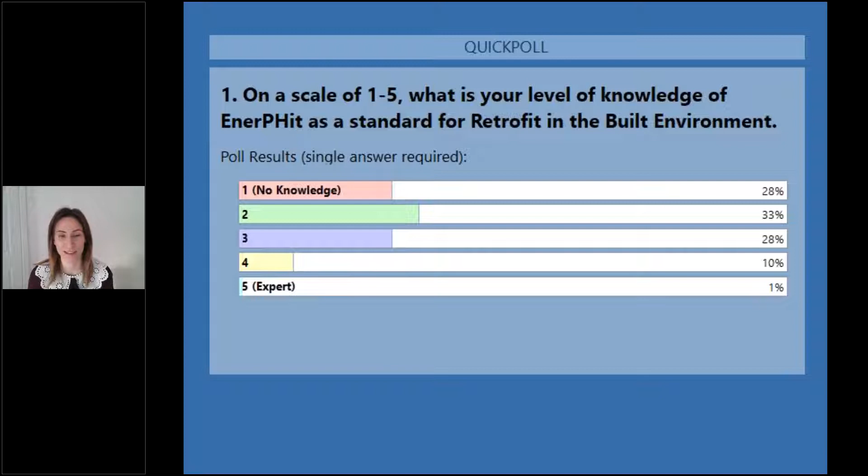Barbara is an experienced building performance specialist, leading Hab Lab building performance evaluation service and deep retrofit projects at John Gilbert Architects, focusing on post-occupancy evaluation, energy efficiency assessment, energy modelling, indoor air quality, ventilation, and much more. Barbara holds a wide range of sustainability accreditations, including the Level 5 diploma in retrofit coordination, risk management, and she is also a certified passive house designer. Barbara has also been instrumental in supporting Construction Scotland Innovation Centre with Low Carbon Learning, and in particular our immersive learning modules, which I'll mention later.

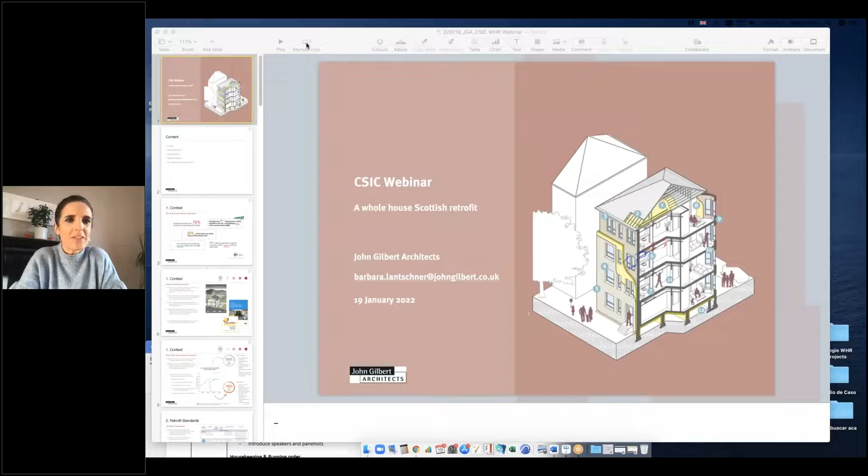So yes, I will be talking about a whole house retrofit and our experience in the last years implementing these whole house retrofit strategies across Scotland. So this is how I'm going to structure my presentation. I'll first talk about the context and a little bit about what deep retrofit and whole house retrofit means. I'll then guide you through the different retrofit standards, specifically the ones that follow this whole house retrofit approach. After that, I'll be talking about Hab Lab, which is a building performance evaluation service within John Gilbert Architects. The reason I'm going to talk about that is because it's very much linked to all the topics we're going to talk about today.

I'll then talk about different whole house retrofit strategies, and for the rest of the presentation, which is about 50%, I'll use Niddrie Road as an example of how we implemented many of these strategies. So why are we talking about retrofits so much? My role within John Gilbert Architects is I'm working 95% of my time on retrofit projects, so we are taking it very seriously. It's not only me in the office who works on retrofit. I have several colleagues working on that, and we also work on conservation, trying to merge these two types of projects to follow this whole house retrofit approach that I'm going to explain shortly.

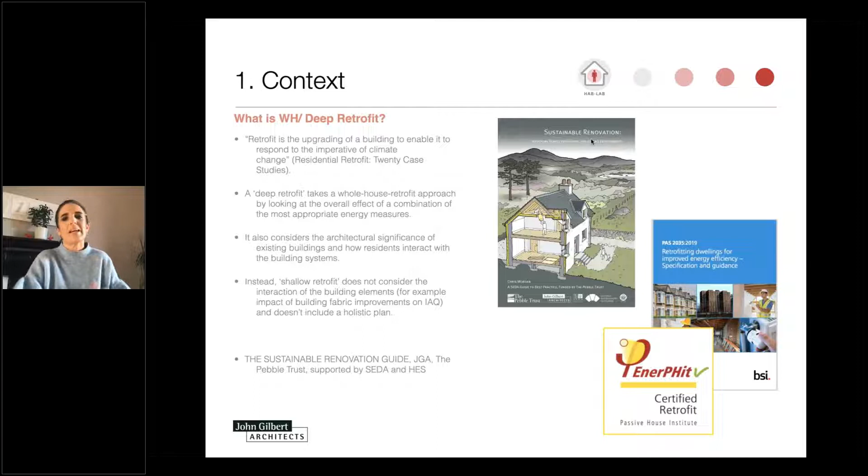Instead, shallow retrofit or conventional retrofit, or what we knew about retrofit until now, does not consider the interaction of the building elements. For example, and this is something very common, it's someone upgrading the building fabric without evaluating how that would impact indoor air quality or ventilation. So even if you're just installing one measure, you need to understand how that will impact the other building systems and have a plan in place to mitigate risks.

So there are many publications out there, many very useful guides, and there has been a lot going on lately. Last year, we saw very interesting guides that I will touch on in the next slides. One that I'm not going to talk about, and I suggest you have a look at,

is the Sustainable Renovation Guide, which is free to download, written by Chris Morgan, a director at John Gilbert Architects, and prepared for the Pebble Trust and SEDA, and Historic Environment Scotland. I do suggest you download that guide, which is very much linked to sustainable renovation in the Scottish context.

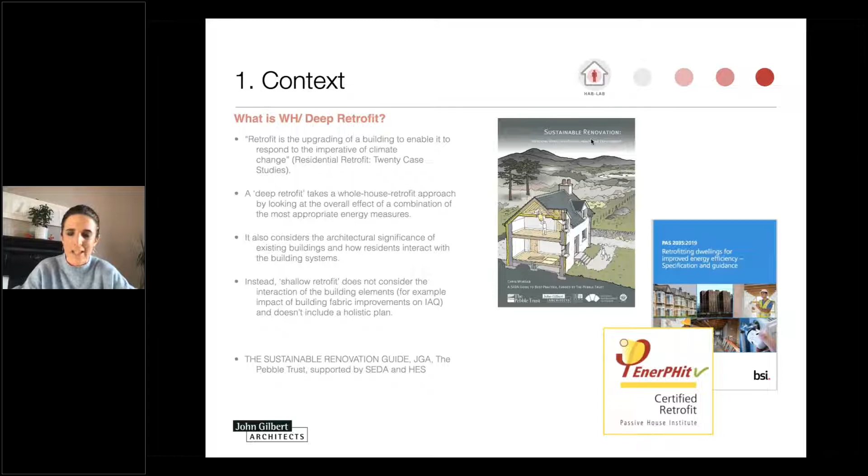So, talking about deep retrofit versus shallow retrofit, if we focus on the climate change targets and what we see in the graphic there, if we actually want to meet that transition to net zero and continue implementing shallow retrofit rather than whole house retrofit, the space heating demand or carbon emission savings are going to be about 30%. And that, as the graph shows, is not sufficient. We need to meet the targets.

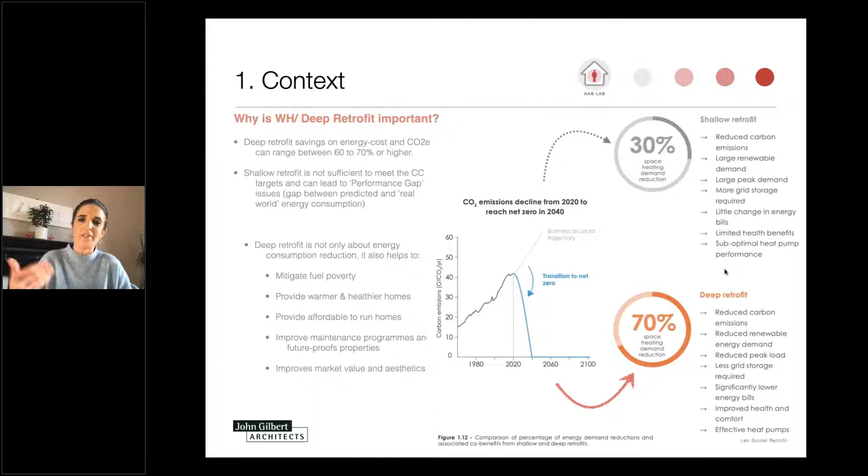We need a robust plan in place, and that requires deep retrofit. Whether the retrofit plan is staged or not, we will cover later on. There are different ways of implementing it, but it needs to be deep retrofit and whole house retrofit. Those graphs, by the way, I took from the LETI guide, which I'll also cover in this presentation, but I suggest you have a look because that's also a free resource.

Deep retrofit is not only about energy consumption reduction, it also helps us mitigate fuel poverty, provide warmer and healthier homes, provide affordable to run homes, improve maintenance programs and future-proof properties, and improve market value and aesthetics.

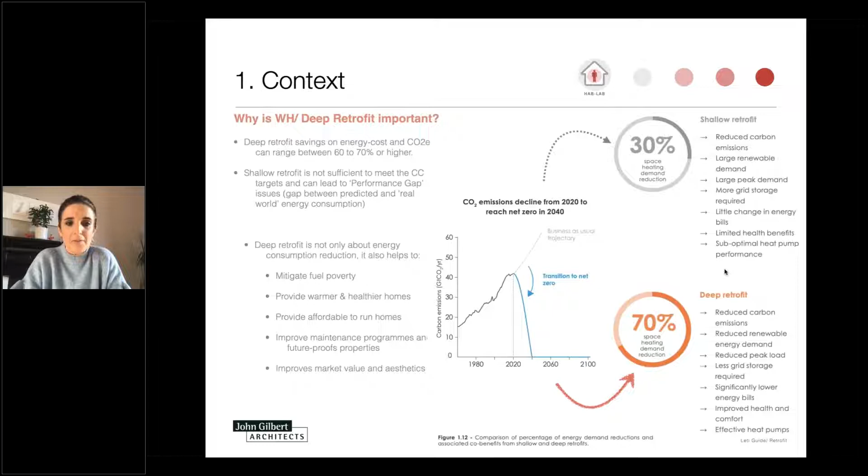So, I will also cover PAS 2035 in my presentation because I'm sure that you've already heard about it. It's now a requirement for some of the funding streams, for example, ECO3. It's not proposing a specific performance target, but it provides best practice guidance and quality assurance for domestic retrofit.

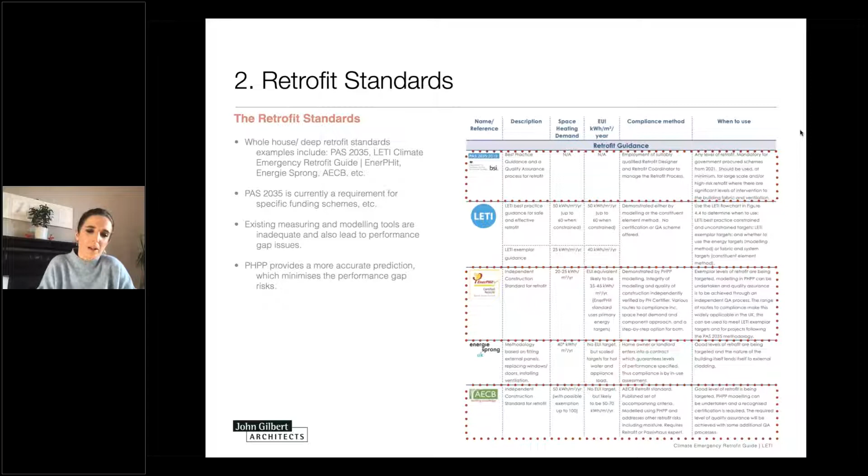And one of the things that some of the standards provide, for example EnerPHit, I would say specifically EnerPHit, is a modeling tool to be able to accurately predict how a building will perform after we implement the retrofit measures, and that will basically minimize performance gap issues. The other very interesting thing that EnerPHit provides is a quality control and a certification scheme. So all of this will minimize as much as possible the performance gap.

So what's EnerPHit? Passive house proposes, as you probably know, stringent performance targets, which are great because it ensures that the house will be not only efficient and cheap to run, but also comfortable, and it will future-proof the project. But in the case of existing buildings, we're not able to control many of the parameters, such as orientation, structure, occupation, shape, or the amount of glazing.

So because of that, Passive House several years ago developed the EnerPHit standard, which takes into account all these limitations. So basically what it does is relax some of the criteria that are used for new build. So it's not exactly the same as new build, but it follows the same methodology. It also suggests using PHPP, which is the energy modeling tool. It still insists on making a building as airtight as possible, but at the same time providing a robust ventilation strategy.

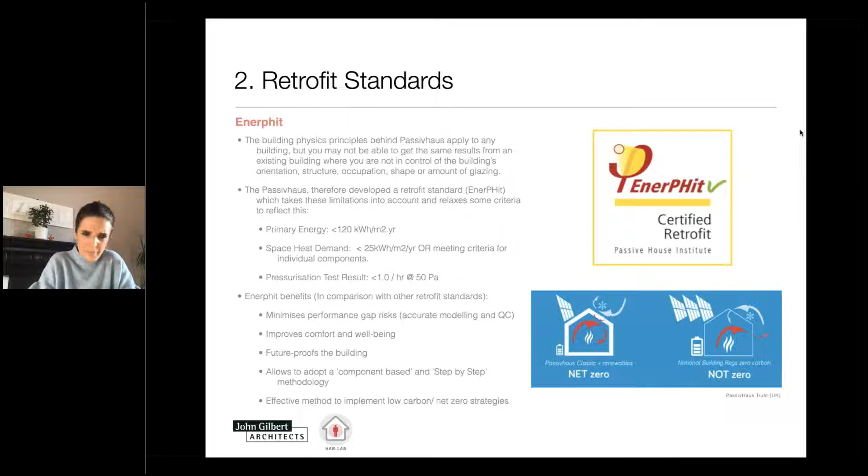And overall, the benefits of EnerPHit compared to other standards are that it minimizes the performance gap as low as you possibly can, improves comfort and well-being, future-proofs buildings, allows you to adopt a component-based approach, and also a step-by-step methodology.

PAS 2035 is, as I mentioned before, not proposing a specific performance target. So it's not focusing, let's say, on a specific airtightness target or energy consumption target or space heat demand target. What it does instead is provide best practice guidance on what process a retrofit project should follow to ensure that we are minimizing the performance gap. So it also works around performance gap. It follows a whole house retrofit without necessarily proposing a specific performance target.

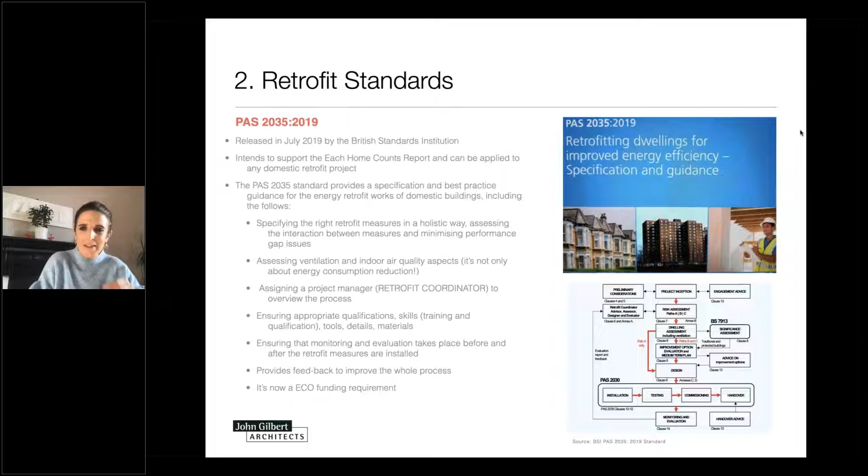It was released in July 2019. That's a couple of years ago, but the industry is still trying to adapt to it. It is intended to support Each Home Counts, which I also invite you to read and go through, because it was in response to that that this retrofit standard was prepared. And it's important to remember how things were working, what the main issues were that the industry was facing and is still facing, and how the standard proposes to mitigate those risks and issues.

So it provides a specification and best practice guidance for energy retrofit works, specifying the right retrofit measures in a holistic way, assessing the interaction between measures and minimizing performance gap issues, assessing ventilation. Ventilation was not really in the scene unless you would work with EnerPHit and these other standards that I mentioned before. Until now, there wasn't really a need of thinking, and there was no guidance in the UK suggesting that ventilation had to be part of a retrofit strategy.

So assessing ventilation and indoor air quality aspects, assigning a project manager, which is the retrofit coordinator, to oversee the process, ensuring appropriate qualifications. That includes assessor, advisor, evaluator, etc. Ensuring that monitoring and evaluation takes place before and after retrofit measures are installed, which is done by the retrofit evaluator. It provides feedback to improve the whole process, not only to clients and architects, but also to the whole industry. And as I mentioned before, it's now an ECO funding requirement.

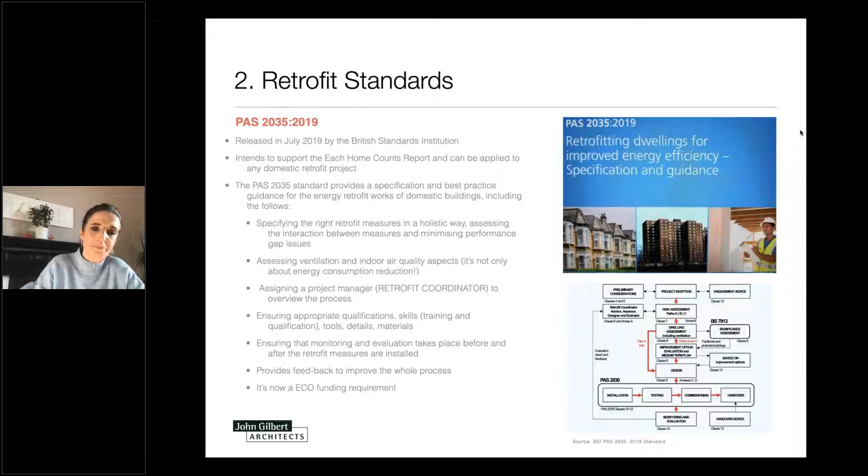So a little bit about HabLab. I started at JGA actually as a building performance specialist, working 100% of my time on building performance evaluation, and that is HabLab, which is a consultancy service within John Gilbert Architects. It actually started about 7 years ago as a project, and it's now a service, and there are several of us working on it. What we do is provide building performance evaluation for clients. Most of our clients are housing associations and local authorities, but we have also done it for private owners and for commercial buildings.

So building performance evaluation is the process of evaluating the real in situ performance of buildings with, I would say, more scientific methods. So what we do is visit the building, install sensors, and understand in depth how those buildings perform. What the HabLab studies has helped us is to provide accessible POE for clients. That means commercially accessible, because there are many out there doing building performance evaluation. But what we have developed together with the Glasgow School of Art is a methodology to make this commercially feasible.

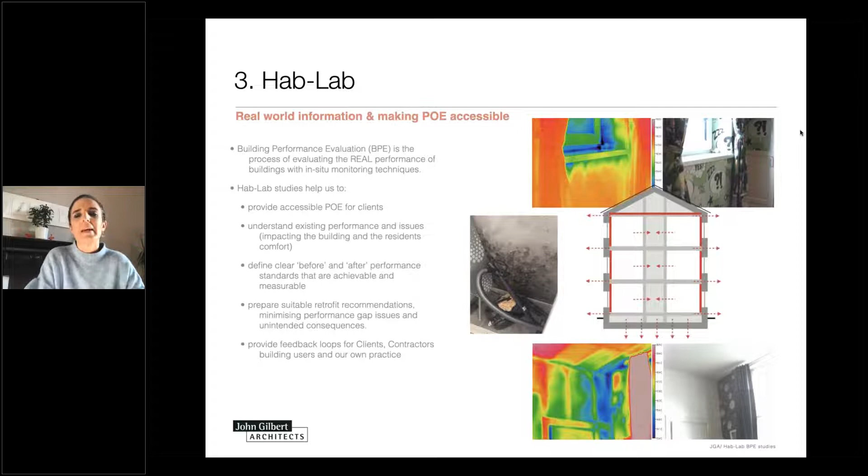What you see in this slide are the types of test and equipment that we use or can use for our building performance evaluation projects. Most of these projects are retrofit projects. We sometimes have evaluated new build projects to see how they perform, but we generally use it for retrofit projects. So we go to a building that hasn't been retrofitted or that has been recently retrofitted and evaluate how it is performing. The brief and exactly what to test is defined at the very beginning with the client and discussed, and we base that on the available time and resources.

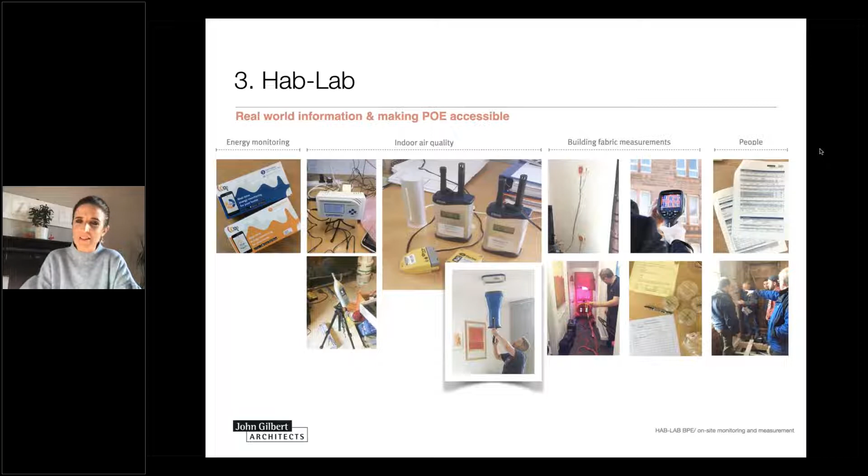But in general terms, we monitor energy consumption, that's gas and electricity. We monitor indoor air quality. I will cover this in the next slide, so this is just a general overview. And building fabric measurements. And last but not least, we also conduct in situ surveys with occupants to understand comfort levels and understand how they use the buildings and how the buildings are impacting their comfort and health.

So we've done this, as I mentioned before, for about 7 years now, and I will try to summarize in this slide what we have found in existing buildings or in buildings that had been recently retrofitted or improved. So the first thing is that for buildings where building fabric measures had been installed, we have seen that the buildings are generally more airtight and more efficient, but unfortunately not designed correctly, and that creates gaps in the insulation layer and in the airtightness layer, which leads to heat losses, moisture, dampness, and indoor quality issues.

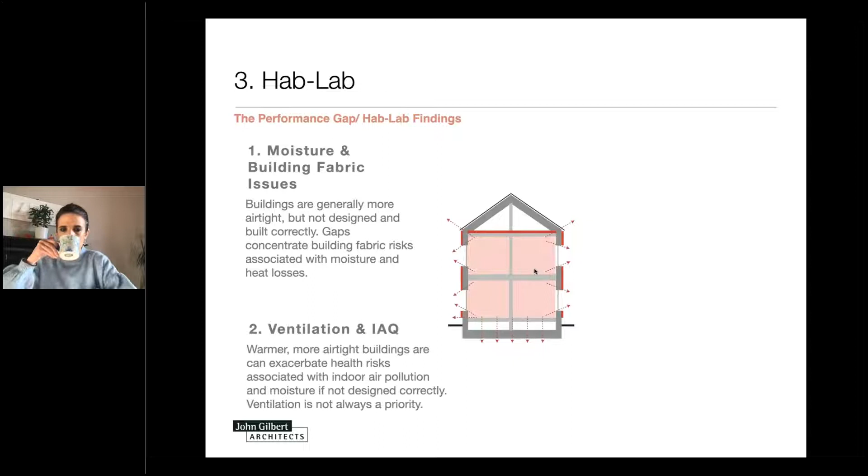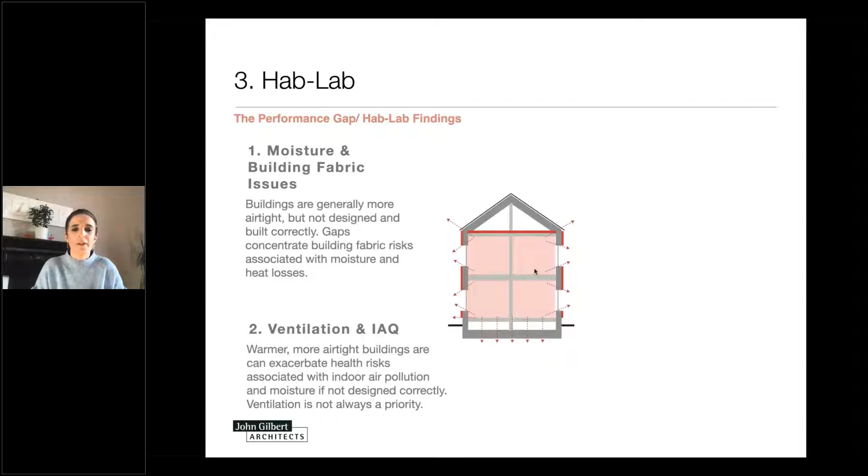The second point is ventilation and indoor quality. So the issue around that is that we found that warmer and more airtight buildings can exacerbate health risks. I do want to clarify this: we do want buildings to be airtight, and we need buildings to be airtight, because that will minimize and reduce heat losses. It will reduce heating demand, and it will reduce CO2 emissions.

But if we make them more airtight without developing a ventilation strategy, that would lead to poor indoor quality, which impacts the occupants' health and comfort. So airtightness is not a bad thing, it's a great thing, as you probably understand, but it needs to come together with a robust ventilation strategy.

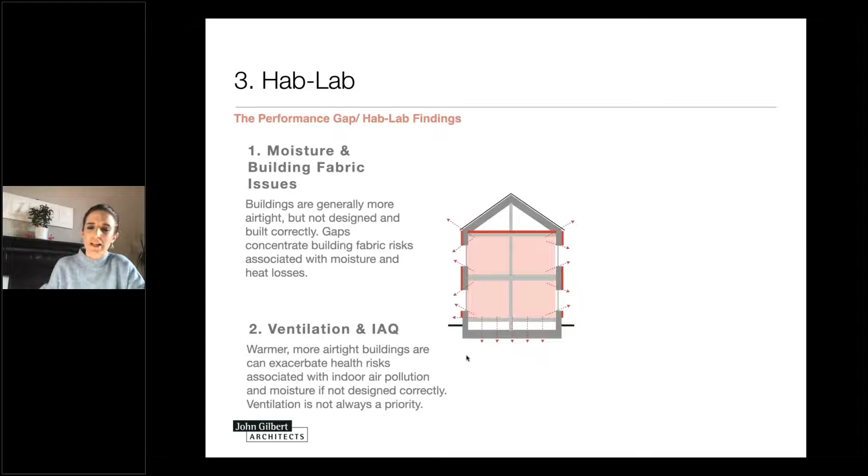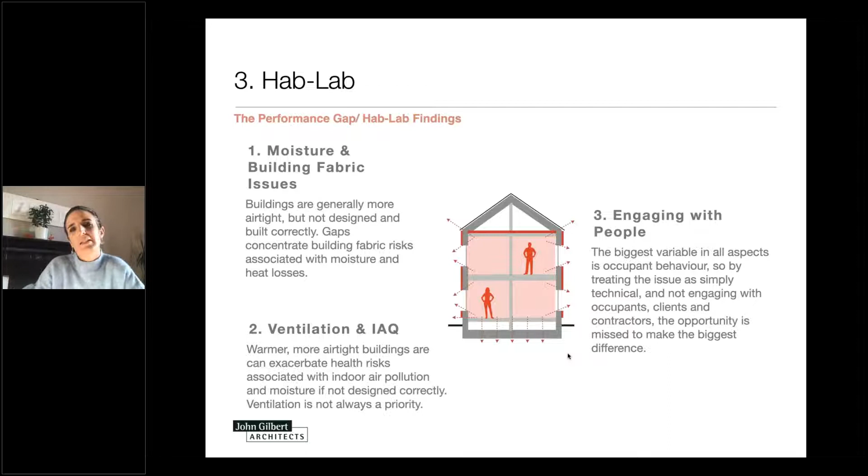And the third point that we have found is that retrofit works are generally too focused on the building, and they underestimate the impact of engaging with people. So one of the biggest variables is how to engage with the building occupants, but also how to engage with contractors. And all of this is a missed opportunity: not informing well and not discussing these retrofit recommendations or works with the residents, and not making sure that everyone understands the purposes of a retrofit project, can lead to performance gap issues.

So the next couple of slides show some examples of how we use these techniques. For this specific project, we had to prepare deep retrofit recommendations for a series of cross-wall properties. You probably have seen these buildings in Scotland and across the UK. These properties were built around the 1950s, and the building fabric is a mix of cavity brick walls and infill walls.

So we used thermography to highlight that difference, to analyze how the cavity brick walls were performing, where the issues were, and how the infill was performing. So if you see the thermography at the bottom, you see different surface temperatures and how one wall was performing differently than the other.

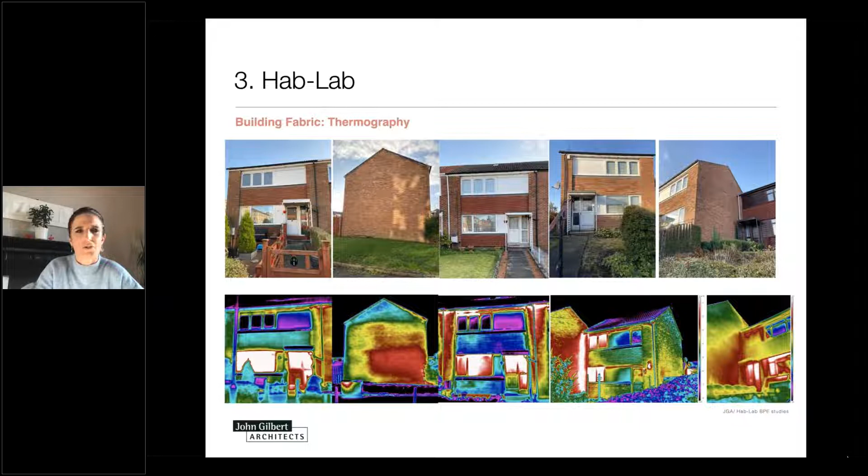So we prepared, based on that recommendation, airtightness and insulation recommendations based on what we were seeing in the thermography survey. We also conduct airtightness tests, which you probably know very well, so I'm not going to focus on airtightness. What I wanted to show here is that while we do the airtightness test, which is the process of pressurizing or depressurizing a property by installing a big fan that you see there in the picture, we also do a smoke pen test while we conduct the airtightness test.

The person in that picture is actually Tom Barber from Thermal Image UK, who does most of our tests. And what he does, and sometimes we do as well, is walk around with a smoke pen, identifying where the air leakages are. That's not necessarily common practice and not required in the building regulations, but the end result is not only going to be the general airtightness. We will also know specifically where the main areas of air leakage are.

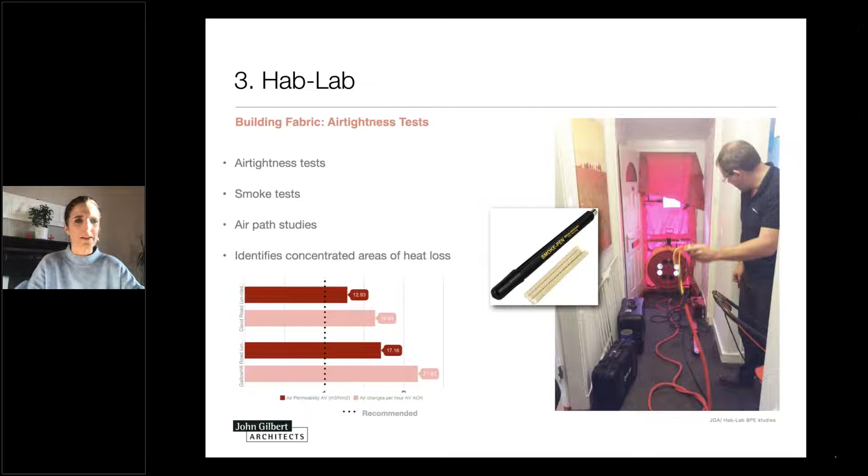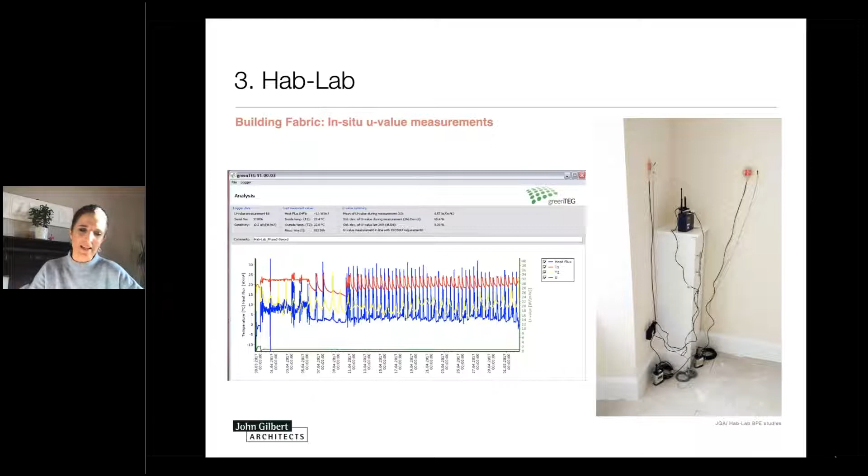We also do in situ U value tests to measure what the U value of different walls is. This is a more intensive, time demanding and expensive test, but you can do it if you have the time and the budget. So these are things that we have done in the past to prove existing and improved performances.

And we measure indoor air quality in most of our projects. The minimum that we recommend to monitor, if you don't have budget or time, is relative humidity, temperature, and CO2. This will give you a good idea of comfort levels and risks of mold growth by knowing the relative humidity. CO2 is a proxy to have an idea how efficient the ventilation system is and how good the indoor air quality is. A high concentration of CO2 is not dangerous, that's not a worry, but it's an indication that there might be other pollutants affecting our health.

So those three give us a good idea of indoor air quality. If the client wants something more detailed, in addition to that we can do formaldehyde, VOCs, and particulate matter monitoring to analyze different types of things. It really depends on the project.

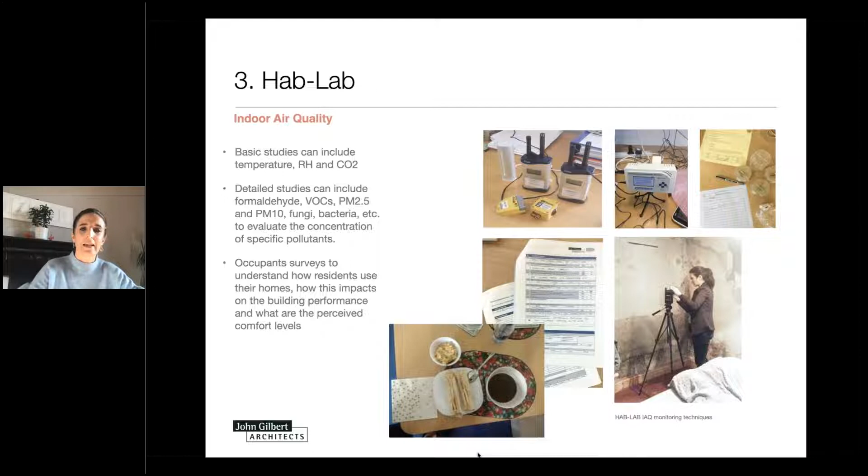And as I mentioned before, we conduct an occupancy survey. What you see there is a lunch that one of the residents prepared for me once. Of course I didn't ask for that, but I welcomed it because it was great. Sometimes occupancy surveys are not necessarily structured. It's about having a chat with the resident to understand, without making it too formal, how they perceive their houses, where the issues are, how they use their systems or not, if they understand where the ventilation controls or trickle vents are, and you need to take your time to do that.

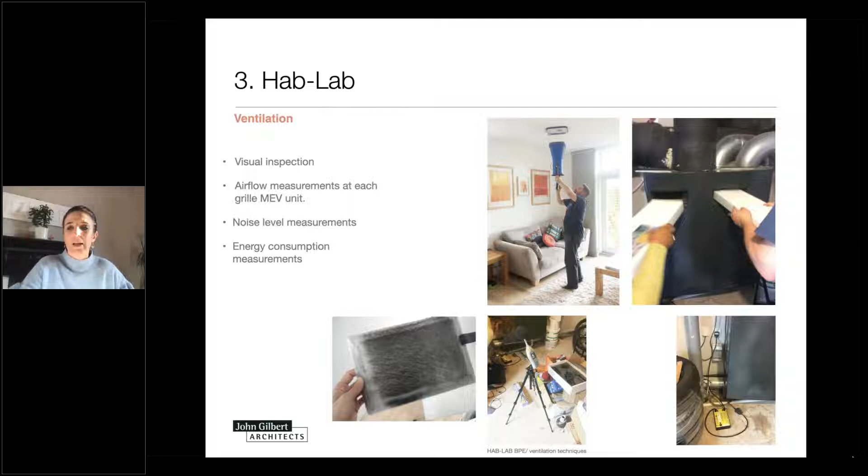We also measure the efficiency of ventilation by visually inspecting it. If there is a mechanical ventilation system, we take airflow measurements. What you see there on the top left is Chris measuring airflow with an airflow meter. Top right is us checking the filters of an MVHR. And in the bottom, we're measuring the noise levels of an MVHR. We're checking the condition of filters and measuring the energy consumption of an MVHR.

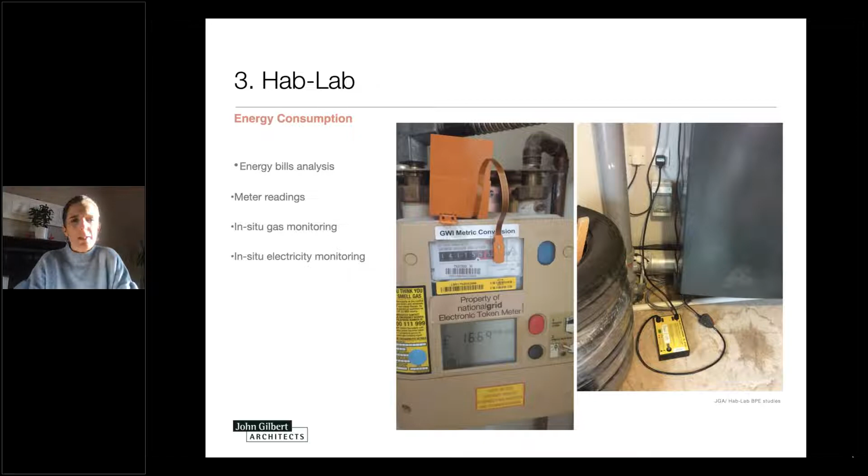And the last thing is that for the majority of our retrofit projects, pre and post, we conduct an energy consumption analysis. If we can't install sensors, we ask for energy bills and try to analyze a couple of months of energy bills. If that's not available, we conduct meter readings. And if possible, we conduct in situ monitoring.

And the last thing about HabLab, we engage with people, not only with residents. We try to do that throughout the process, from the very beginning, engaging with the client, trying to understand the brief in depth, conducting accurate modeling and informing the client. We try to improve every day the documentation that we provide to contractors. We try to improve supervision and inspection on site, try different methodologies to improve that, and try to improve the handover by preparing easy to read quick start guides.

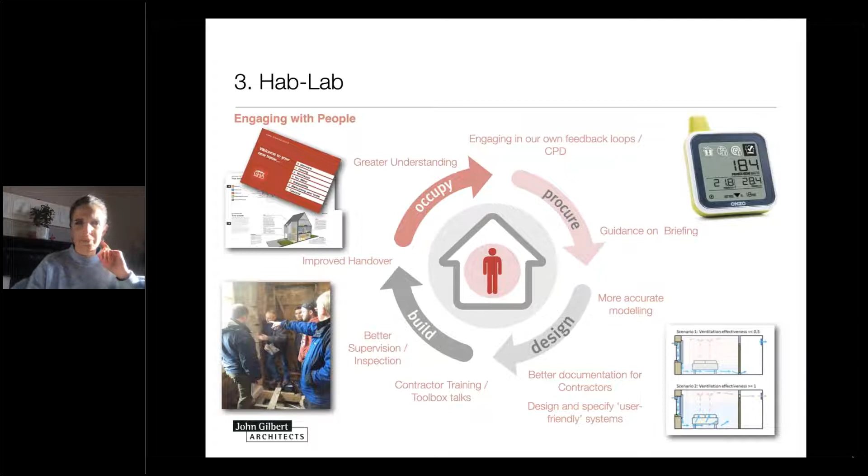So in terms of retrofit strategies, I'll quickly go through that because we will also cover it during the case study. One of the most important things to take into account when considering retrofit strategies is the fabric first approach.

Many standards that we have mentioned before, for example, EnerPHit and PAS 2035, follow this approach, recommended as best practice guidance. The fabric first approach intends to ensure that existing building fabric is as energy efficient as possible before considering the improvement of active systems.

When I'm talking about fabric, I'm talking about walls, roof, floors, windows and doors, the general envelope, and that includes thermal bridging and air tightness. So we should consider all of that. If we can't do it immediately, have a plan for the future on how to improve that before considering active systems, which are heating, domestic hot water, and ventilation.

It prioritizes improvement in 5 stages. Bring the building fabric into good repair, so making it retrofit ready, and that's maintenance, that's not improvement. Improve the building fabric, including insulation and air tightness measures, minimizing thermal bridging in order to reduce the heating demand. Meet the remaining heating demand using an energy efficient space heating and domestic hot water system.

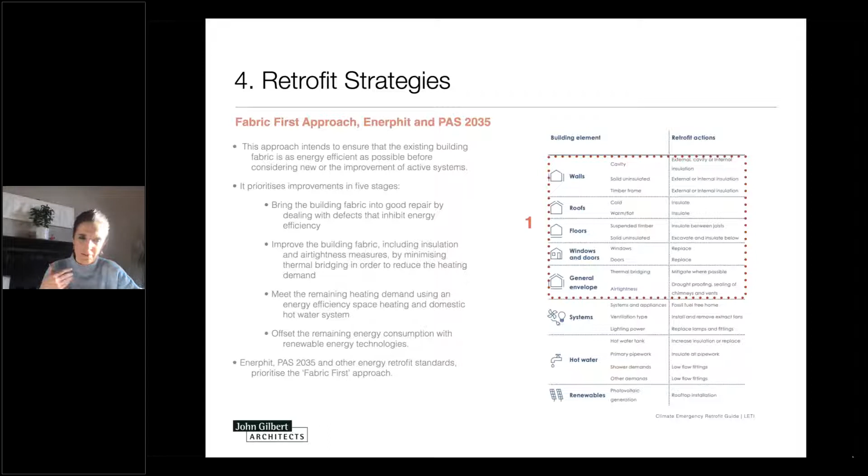So that doesn't mean that the active systems are not important. What it does, it prioritizes, it puts envelope first. It suggests a sequence on how you have to consider the measures.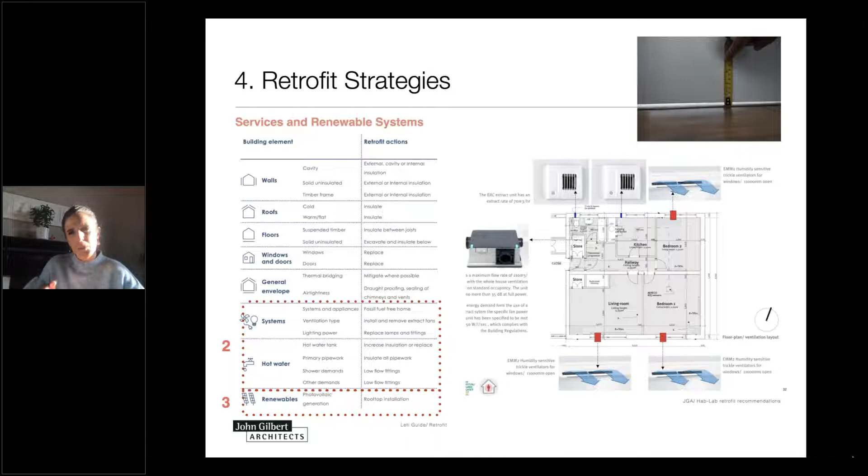The other thing that I wanted to mention is that some of the retrofit standards that we mentioned before have an option of implementing these retrofit measures in a step-by-step strategy. A radical whole house retrofit is great, but many times there are great financial barriers, and even if there is a budget, there is disruption, or properties are occupied. So it's sometimes not possible to do this all in one go.

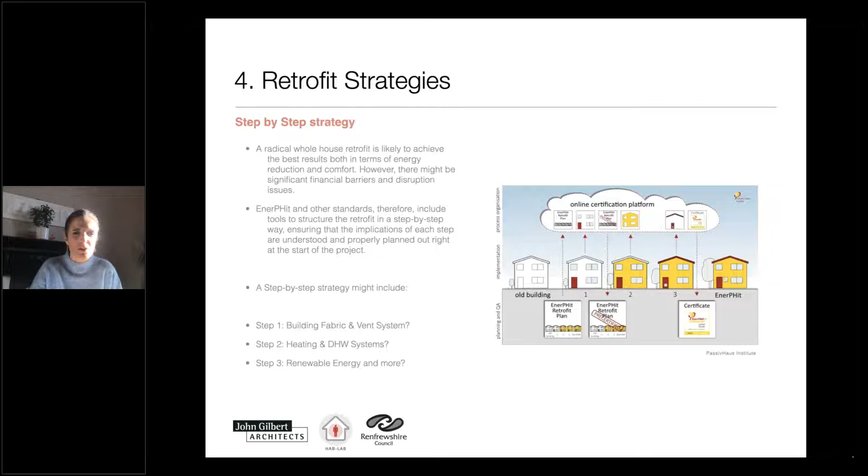So EnerPHit and other standards, and what you see on the right is a graph prepared by the Passive House Institute specifically for EnerPHit, suggest a way of implementing this in steps. One way would be to first improve the majority of the fabric, let's say everything except the floor because people are living there, and also install the ventilation system to ensure good indoor air quality. The second step would be heating and maybe domestic hot water system, and the third step could be renewables.

LETI, which I mentioned before, published a retrofit guide last year, which I really recommend you have a look at, because it's also free to download and they're doing great work. You can also volunteer and get involved.

But the great thing about this guide is that it takes into account different standards, for example, Passive House and EnerPHit, and also provides performance targets, some of which are based on EnerPHit. So these are the LETI performance targets, and I suggest you have a look.

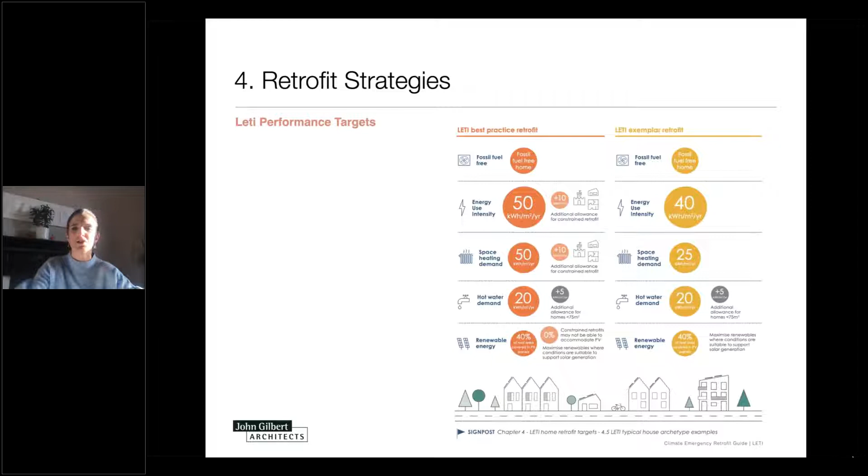So I'll now try to cover a very big and complex project, which is Niddrie Road, in the next 10 minutes.

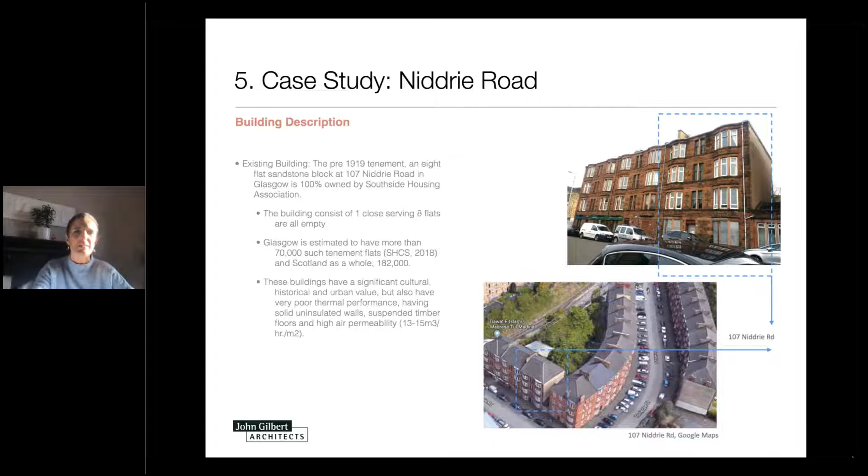When we started the discussion with Southside Housing Association, they wanted to comply with EESSH2, which is the energy efficiency standard for social housing. This standard, according to the Scottish Government, will contribute to reducing carbon emissions by 42% by 2020 and 80% by 2050. What it suggests is that social housing should meet a band B by 2032. That's an EPC of 81, so it's relatively high. That was the first discussion that we had with the client.

But the other need they had is that the layout had to be radically changed to improve accessibility and space conditions. All the properties were void when we started this. So there was a great need to future-proof these properties, to understand how far we could go. They wanted a deep retrofit and a radical approach. So we proposed EnerPHit because we still think it's the most robust and beneficial approach to meet Southside Housing Association targets, but also Glasgow City Council targets, which is one of the partners of the project.

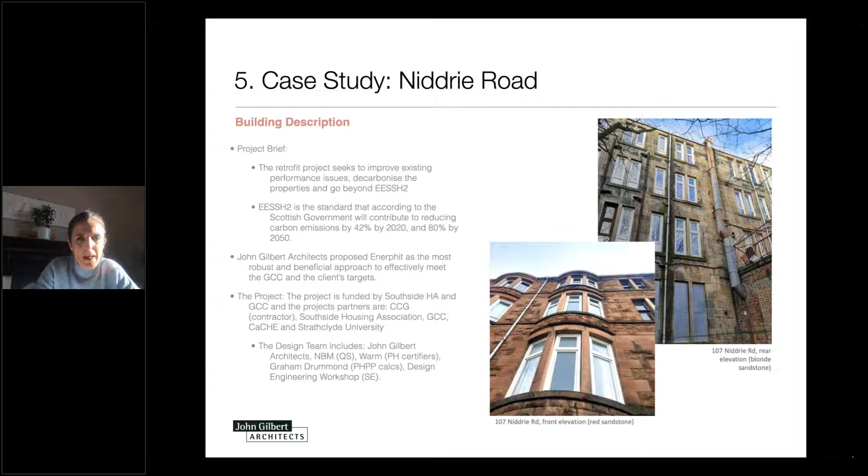Okay, the project is funded by the Southside Housing Association and Glasgow City Council. We're now actually on site. As we were saying before, it's an uninsulated property. There were many challenges, for example, the orientation. The form factor was relatively beneficial, but it's heavily overshadowed, so we can't make use of solar gains, which is crucial for passive house. There are very small southeast-facing windows and a large amount of northwest-facing windows. That means more heat loss than heat gains. And there were significant unavoidable thermal bridges.

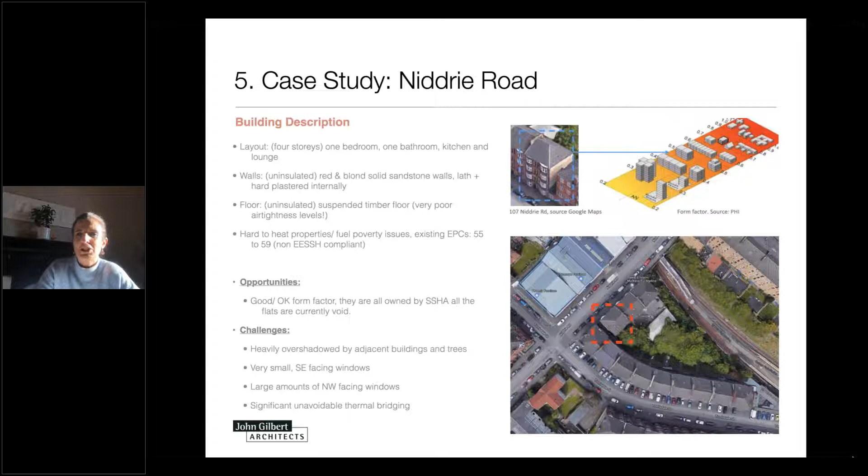That's one of the existing elevations, the front elevation, and the floor plans. As you can see, the WC had a very unusual layout, or actually a usual layout for this type of building, which had to be improved.

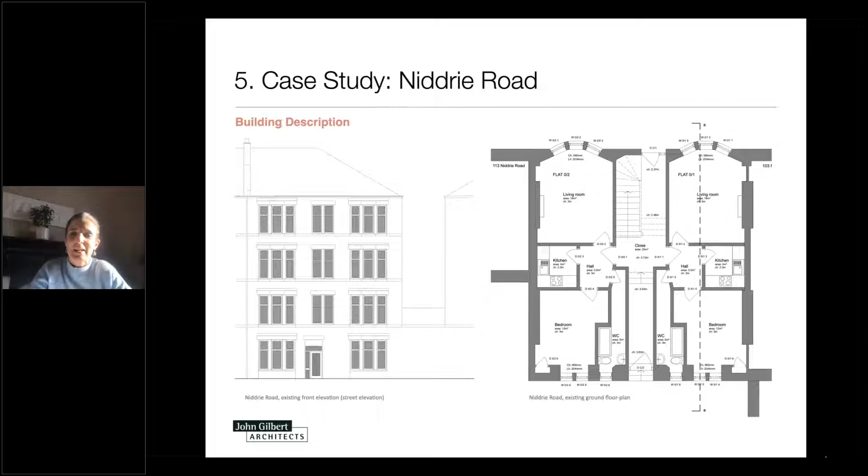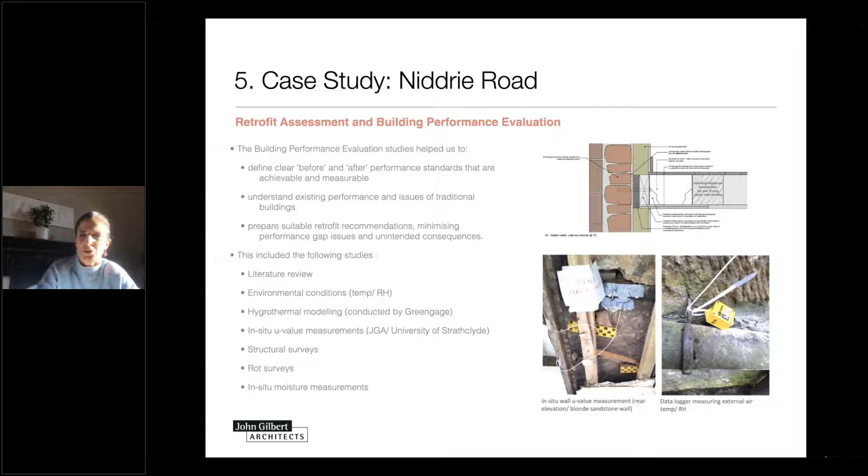We started the project by doing a retrofit assessment and a building performance evaluation, which helped us to define the before and after performance, because we also plan to do the post-retrofit evaluation. It helps us understand existing performance issues and base our retrofit recommendations on these findings. These studies included a literature review and monitoring of environmental conditions, including temperature and relative humidity. We conducted hygrothermal modeling by Greengage, in situ U-value measurements, structural surveys, rot surveys, and in situ moisture measurements.

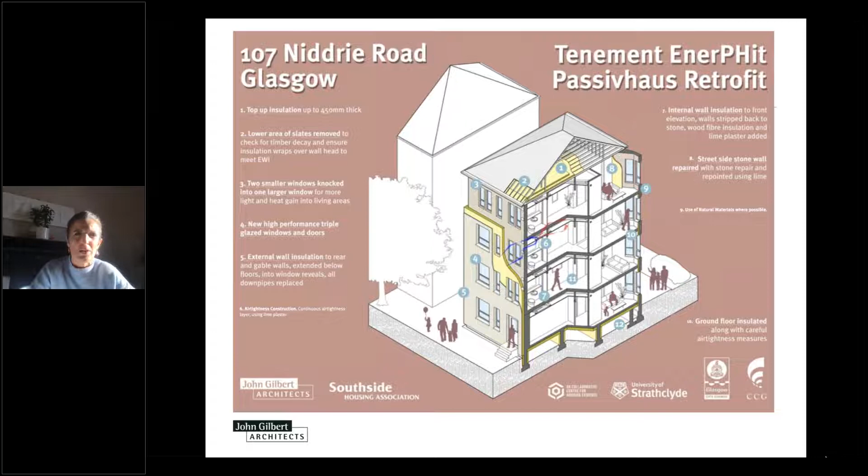In terms of the fabric, we took a hybrid approach, proposing internal wall insulation to the front so as not to affect the conservation aspect of the project, and external wall insulation to the rear and the gable end. We proposed wood fiber for internal wall insulation, which is in line with the breathable sandstone walls, and rock wool for external wall insulation. We did try to specify wood fiber for the external wall insulation, but that had to be changed because of a budget restriction.

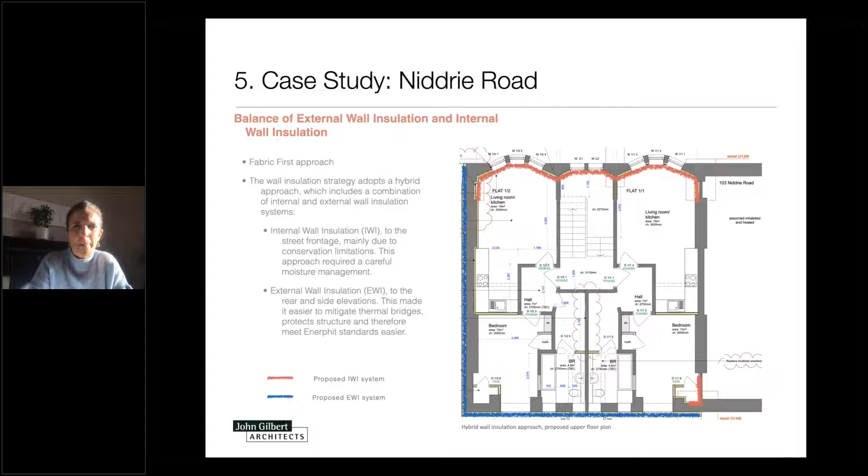We did a good amount of moisture management studies before defining the thickness we had to install for the internal wall insulation. The main worry was how this could affect the joist ends. We did hygrothermal calculations, which confirmed that what we were specifying for the external wall insulation was okay. The internal wall insulation was actually okay. It wasn't introducing any issues to the wall, but it was introducing issues to the joist ends.

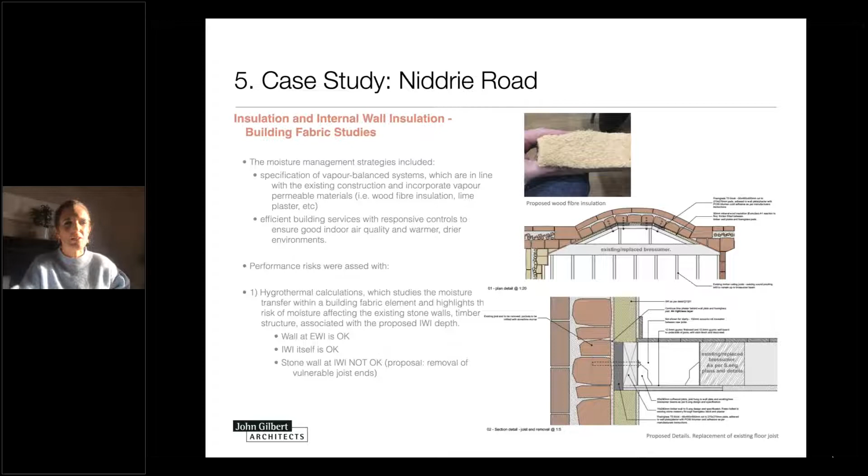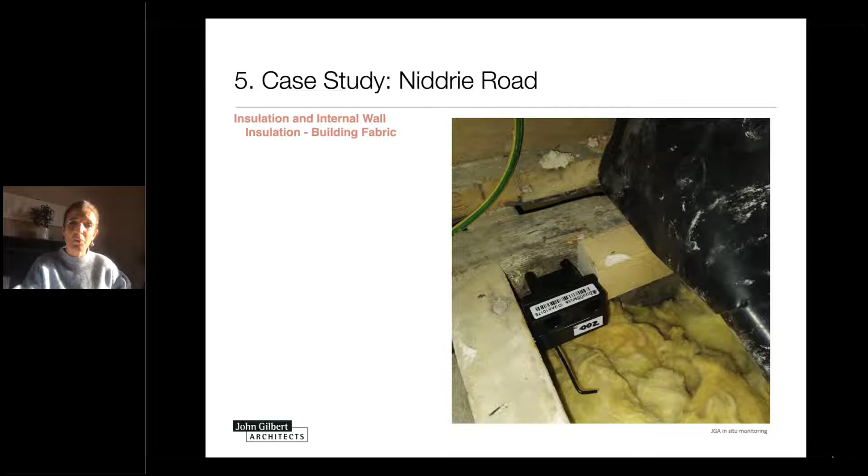After discussing this with the client, we decided to remove the vulnerable joist ends, which is very disruptive, but it was possible in this particular case because the properties were unoccupied. We are now measuring the moisture content of the existing timber joists, and we'll leave the sensors in place for at least 6 months.

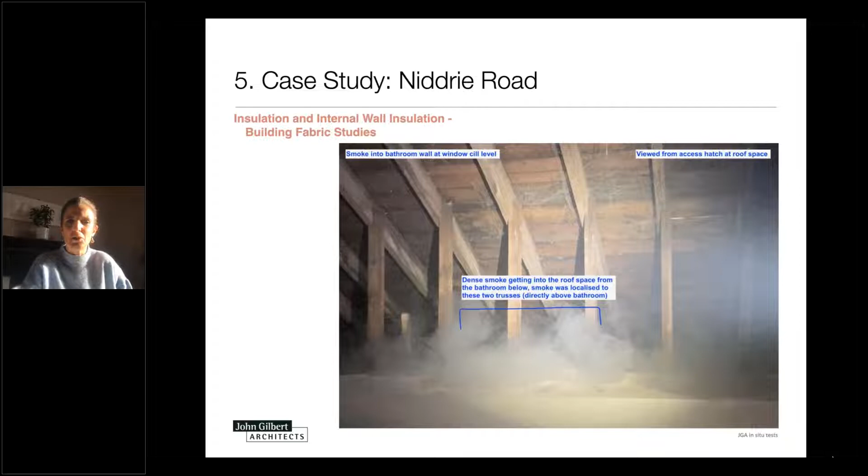It's on site now. We have installed a good amount of the measures, and are also doing tests and smoke tests to make sure that what we are doing is as per detail and it's performing well. So a couple of examples here.

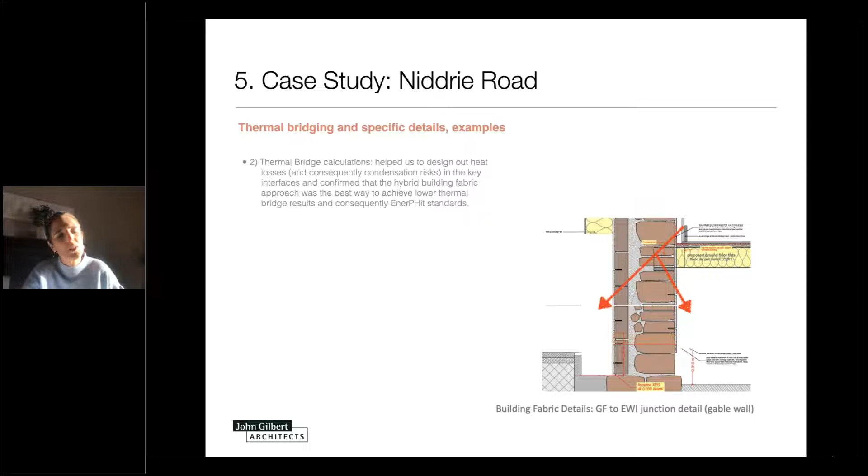I don't have a lot of time, but to show you how we solved the thermal bridging issues, what's the common practice, and how we mitigated this thermal bridging issue. So what you see on the right is a wall base and foundation detail, how it would usually be installed, and the red lines are showing thermal bridging issues. And that's what we did, extending the EWI and insulating it internally to mitigate the thermal bridge.

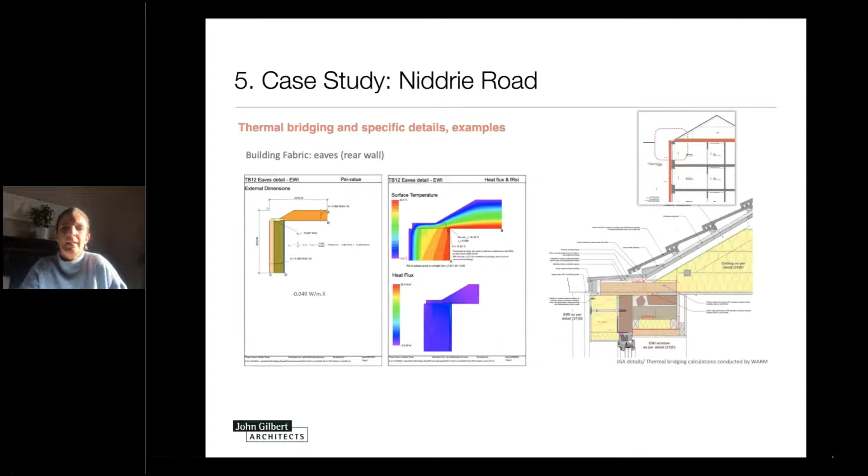And we modeled it, Warm actually did, to prove that the thermal bridge was actually acceptable to meet passive house standards. Same for wall head details. And we also specified triple glazed windows, which is one of the requirements for passive house for this type of geographical location, which was also in line with the conservation strategy. And it was a long discussion with planners to try to keep the existing architectural features. So triple glazed and timber frame windows.

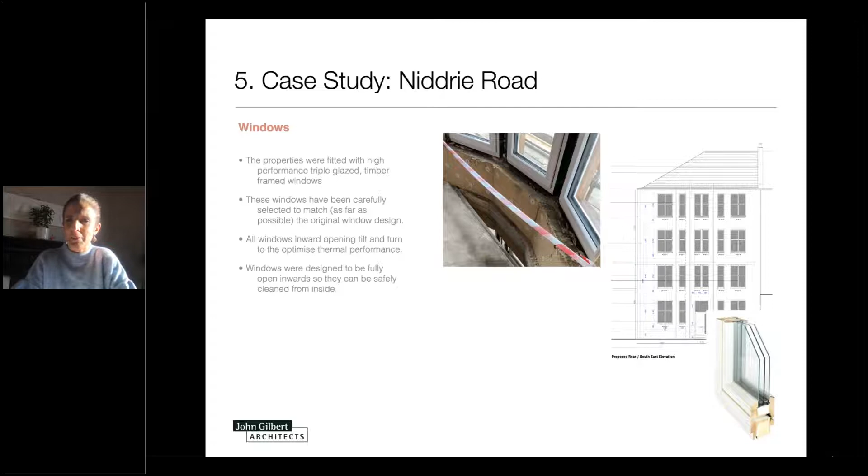Last one, services. We have looked at many options for services. We've analyzed different types of renewables, which is a very big challenge for tenement blocks. And finally, after modeling and analyzing different options, we ended up installing a mix of air source heat pumps in the ground floor and first floor flats, and high efficiency combi boilers, condensing boilers, to be able to compare these two systems and see if air source heat pumps are robust and feasible options for

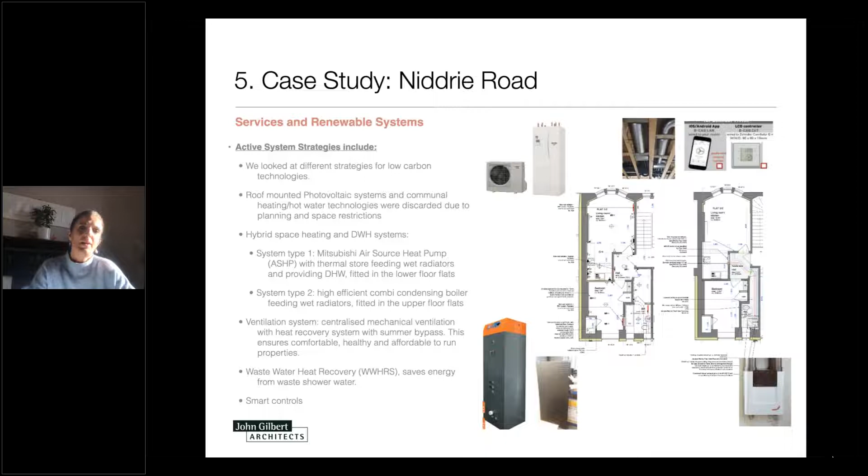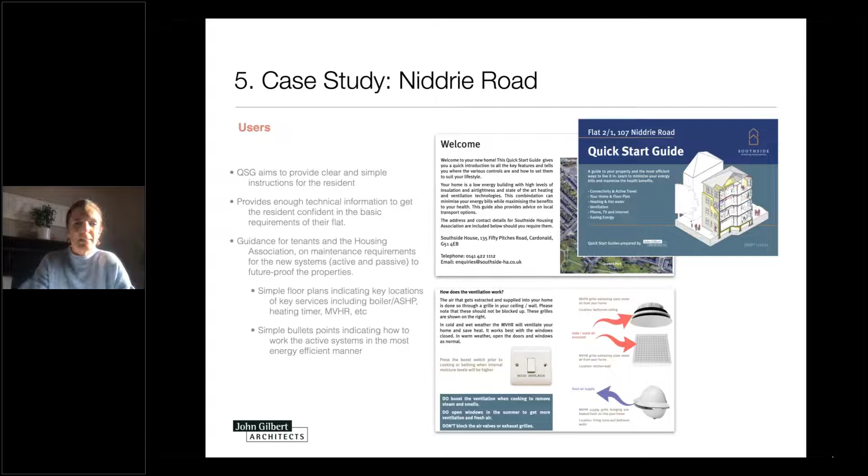tenement buildings. We also installed a wastewater heat recovery system, a centralized MVHR system, and smart controls. I won't be able to cover the modeling results, but happy to cover that during the Q&A. And last thing, we prepared a quick start guide for the future residents with very clear and simple guidance on how to best use the systems. And I think that's me. Thanks very much, and I apologize if I talk too much.

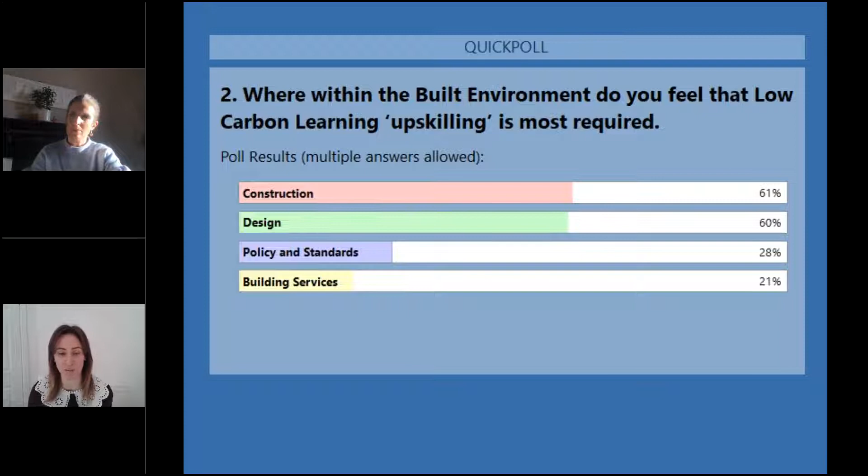So here's our next poll. Where within the built environment do you feel that low carbon learning and upskilling is most required: construction, design, policy and standards, or building services? Just keen to get your thoughts on that. Around construction and design being the most, and I think particularly when we're discussing the fabric first approach, that's really instrumental.

We're just going to move on to our questions now, and we have a question, Barbara, from Mila. She's asking, what are the deep retrofit costs for a typical Scottish 3-bedroom semi, and are these costs prohibitive to homeowners?

I hate to say this, and this is probably not the answer you'll want to hear, but it really depends on how you're going to implement this. One thing that I would suggest is to do this with an architect or a professional who understands whole house retrofit approaches and can prepare a deep retrofit plan that, if it can't be installed in one go, could be implemented in stages. So the total cost will depend on how far you want to go, how far you want to reduce the energy bills, how much you want to improve the indoor quality, and how much you want to future-proof your building or your property.

I think it's not cheap, but yep, it's an investment, because you will reduce energy bills and you will live in a warmer and a healthier home. I'm not going to focus on cost because it's very wide, but I would say it can start from £10,000 to what we did in Niddrie Road per property. It depends if it's a house or a flat, and it really depends on the performance target that you are aiming to meet.